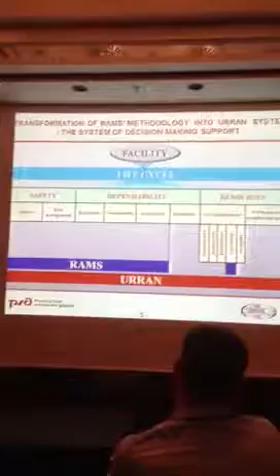Initially, RAMS focused on manufacturers of technical facilities, which didn't satisfy the purposes of Russian Railways that concentrate mainly on operational activity. This led to the necessity for development of operational dependability and safety parameters of railway transport facilities, coordinated with volumes of performed operational work.

As a result, RAMS was transformed into a new project, URRAN, which means Resource, Risk and Dependability Management. URRAN is based on a parameter system including dependability - meaning reliability, availability, maintainability - plus durability, safety and resource parameters. The basic purpose of URRAN application is the optimization of maintenance management, providing the demanded level of operational dependability and an acceptable level of risk.

On this slide you can see 5 main differences between URRAN and RAMS. First, transition from management of facilities into management of dependability and safety of the technological process. Dependability and safety management of the technological process on the basis of a developed system of operational dependability and safety indicators. Investment management on the basis of risk estimation, life cycle cost, durability and maintenance of railway transportation facilities according to the actual state.

Management of the company's capitalization due to economic efficiency enhancement of infrastructure maintenance, and expense justification for reconstruction and modernization to supervising ministers and departments.

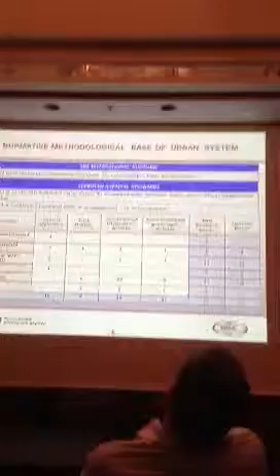The normative methodical base of the URRAN system is carried out in 3 directions: reliability management, risk management, and resource management. The national standards GOST R 54504 and GOST R 54505, developed in 2011, established a set of requirements which essentially changes the decision-making system and allows passing from administrative methods of management to methods based on risk estimation. During the next 2 years, it's planned to issue 2 international standards, 6 national standards, 12 standards of the organization, and 38 documents of methodical orientation and manuals.

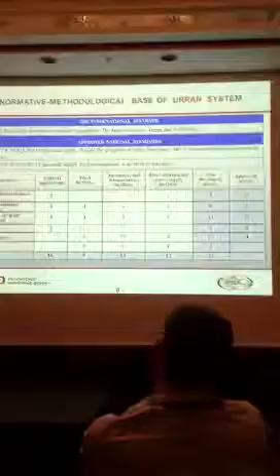It's very important that in GOST R 54505 the following postulates are considered: absolute safety doesn't exist - after acceptance of protective measures, there is always some residual risk. Safety is reached by risk reduction up to an acceptable risk level, defined as tolerable risk. There's a necessity of revision of an acceptable risk level during the life cycle.

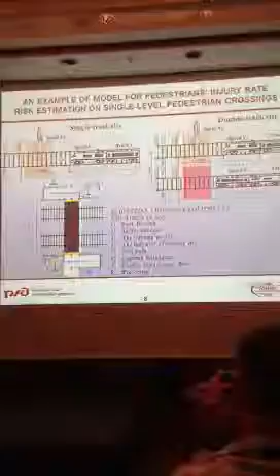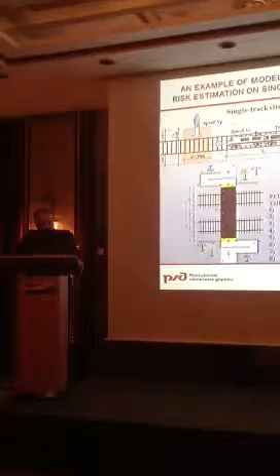On the basis of the developed standards, we carried out work on risk assessment of injury rate of pedestrians on railway pedestrian crossings. At the first stage, key parameters influencing injury risk occurrence were defined: layout, crossing equipment, and characteristics of train operation.

Next, a detailed event tree for risk assessment was constructed and probabilities of injury rate were defined. Then the risk matrix of injury rate was generated. It displays a combination of injury event frequency and the amount of consequences.

At the last stage, recommendations on risk reduction depending on risk class were generated. The carried out work has allowed us to define the necessity of re-equipment of existing pedestrian crossings on the Moscow-St. Petersburg track.

Representation of risk estimation results in the form of risk matrices evidently allows applying them for risk estimation of levels according to operation parameters. In this case, risk deviations from requirements of railway maintenance depending on its traffic density are estimated.

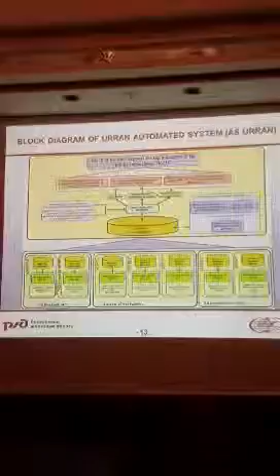In 2011, the automated system URRAN was launched. The automated system provides data gathering from branch automated systems according to facility characteristics of the infrastructure, taking into account their failures, then calculation of parameters and dependability levels of facilities is carried out. Next, aggregated and detailed reports on the dependability of infrastructure facilities for the whole railway network, structural divisions, or separate infrastructure are formed and given to users. At the following stage of automation, problems of planning are solved and estimation of repair results of infrastructure facilities is performed.

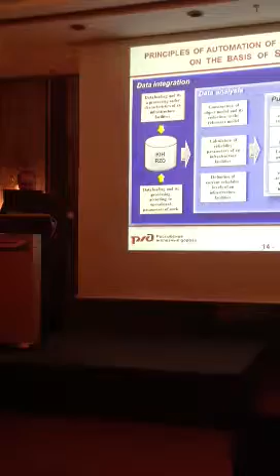SAS software has been selected for development and operation of the URRAN system, which has been successfully used for solving problems for Russian railways during the last 10 years. The SAS platform has provided effective integration of branch systems, diverse data, an opportunity to operate data bulk, and construction of illustrative user reporting, including facilities of the geoinformational system.

In the development of SAS URRAN, a wide range of components from the SAS platform have been used. Besides, the specific product SAS EGRC solution has been purchased, which provides a toolkit for management of operational risks and will allow its use in the further development and automation of URRAN methodology.

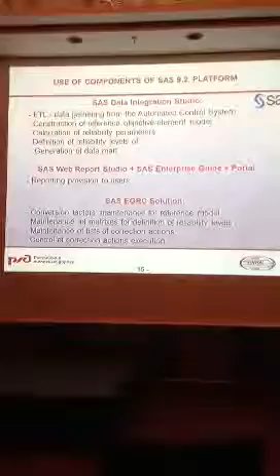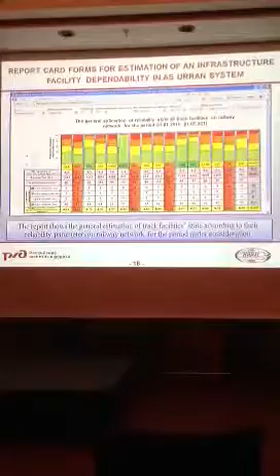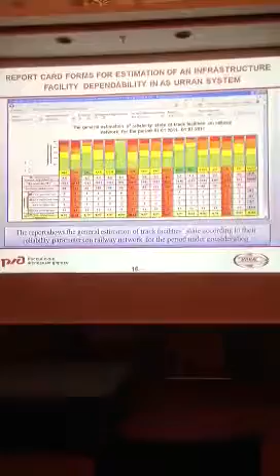Introduction of SAS URRAN at the end of 2011 has allowed users to make decisions on facility dependability estimation of railway equipment. SAS URRAN reports have allowed estimation of the general state of railway dependability of the whole railway network. This report shows the general estimation of track facility state on railway divisions according to their dependability parameters for the period under consideration.

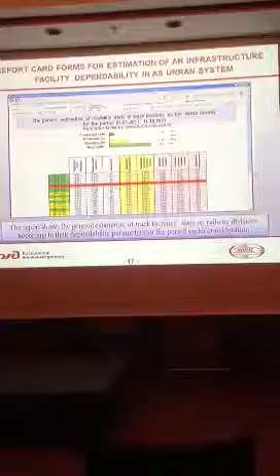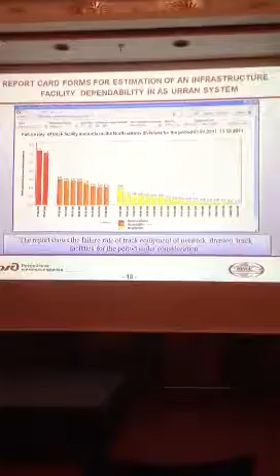This report shows the failure rate of track equipment of network division track facilities for the period under consideration. This report shows kilometer by kilometer estimation of track facility reliability for the considered period, with binding to the digital layout of the railway.

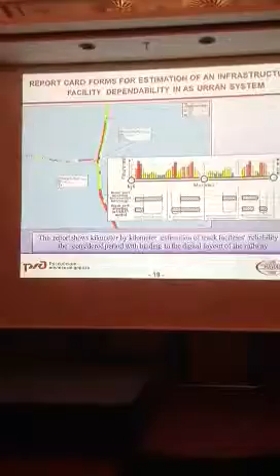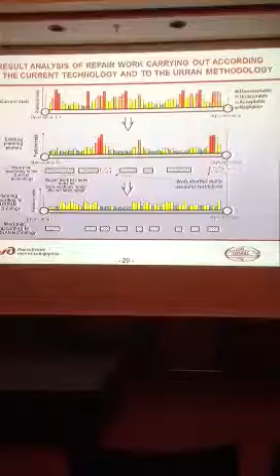In the end, result analysis of repair work carried out according to the current technology and to URRAN methodology. Results of URRAN methodology and the automated system AS URRAN have allowed optimization and increase in the quality of carrying out track repair work on the Northern Railway. Thus, the efficiency of the new methodology application in comparison with the current traditional technology of infrastructure management has been obtained.

First, on this slide you can see the current state of track infrastructure between Yaroslavl and Arkhangelsk. Second, the work plan according to the current technology, where repair work has been done on track sections which didn't need repair. Third, the work plan according to URRAN technology. As you can see, there are no red areas, just what we wanted.

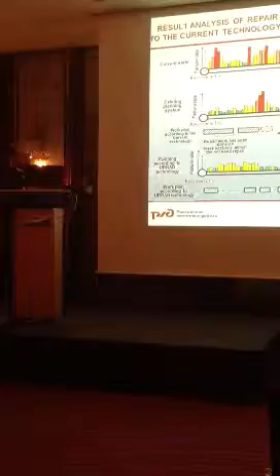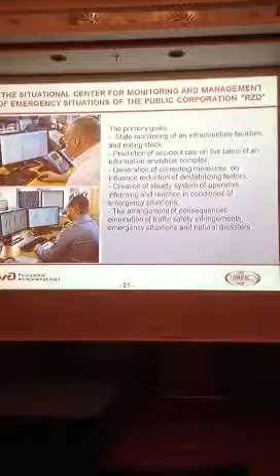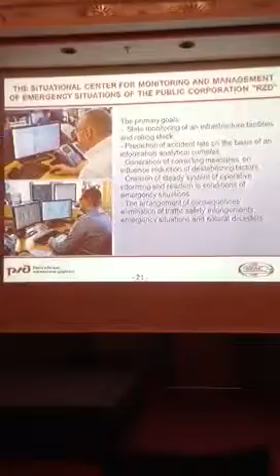The primary users of the automated dependability management system and the factor analysis of traffic safety state are the central and regional boards of administrators of Russian Railways, and the structural divisions which directly carry out works on infrastructure maintenance and arrangement of transportation. In addition, one of the main users of the system is the Situational Center for Monitoring and Management of Emergency Situations of Russian Railways.

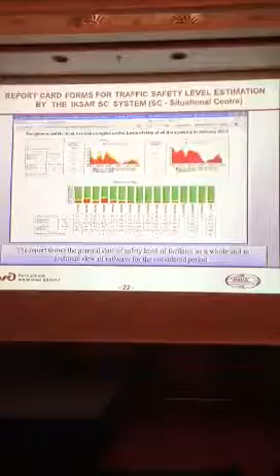This Situational Center was established in 2010. The Situational Center is intended for consolidation, gathering, and processing of data connected with the state of train operation safety, transport and fire safety of railway transport, and external natural factors influencing the transportation process. In addition to risk estimation connected with general dependability of infrastructure facilities, the task of the Situational Center includes traffic safety of train operation, which depends on a lot of factors and processes.

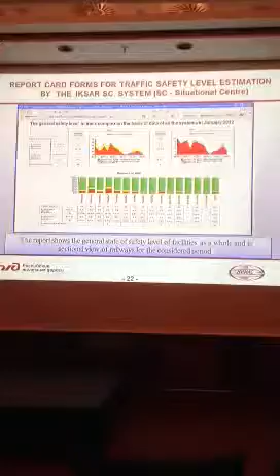For general monitoring and traffic safety analysis, the development of the specialized program IKSAR SC is conducted for the Situational Center. IKSAR SC development is also based on a corporate data warehouse built on the SAS platform. The program represents a number of reports on general estimation of traffic safety state on the railway network and railway divisions. It allows tracing the dynamics of change in traffic safety state in view of accepted measures.

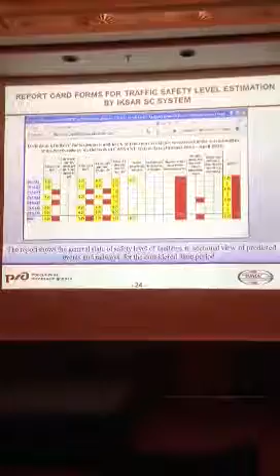This report shows the general state of safety level of facilities in sectional view of railways for the considered period. Another report shows the general state of safety level of facilities in sectional view of predicted events and railways for the considered time period. Duly obtained current state and forecast data of traffic safety allows reduction of risk level and prevention of infringements.

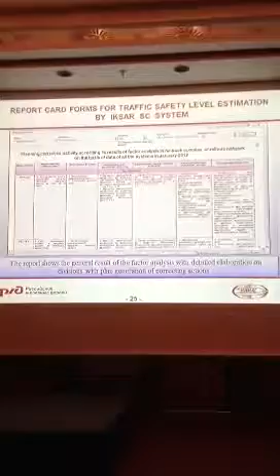As a result, through the programs IKSAR SC and URRAN, users of the Situational Center and structural divisions receive, in automated mode, detailed plans for traffic safety and dependability management of the transportation process.

At present, the risk management system, which integrates organizational structure, the normative methodical base, and the software, is under construction in Russian Railways. It's important to point out that the SAS platform and active involvement of the Russian division of SAS company have played a considerable role in the development of this system.